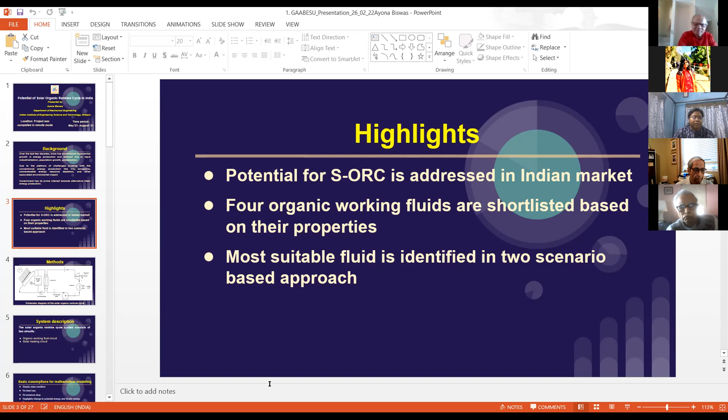Now come to the methodology part. The solar organic Rankine cycle consists of 2 circuits. One is the organic working fluid circuit, and another one is the solar heating circuit. The main components of the circuit consist of solar collector, thermal energy storage, circulation pump, expander, evaporator, condenser, working fluid pump, working fluid, heat transfer fluid.

The organic working fluid circuit consists of 4 processes. Process 1 to 2 is processed through the pump, where the working fluid is pressurized. Now the process through the evaporator. The pressurized working fluid is preheated, evaporated, and superheated by taking the heat from the water of the evaporator, and the working fluid reaches the maximum temperature of the cycle.

Now the process through the expander or turbine. The organic working fluid expands in the turbine, and the mechanical energy is converted into the electrical energy here. The superheated working fluid is cooled in the part condenser to the saturated vapor condition at a variable temperature in the desuperheater, and the saturated vapor is condensed to the saturated liquid in the condenser.

For the solar heating circuit, water is used as heat transfer fluid, and an evacuated tube solar collector is used as solar collector. Now come to the next slide. Next slide. Then next slide.

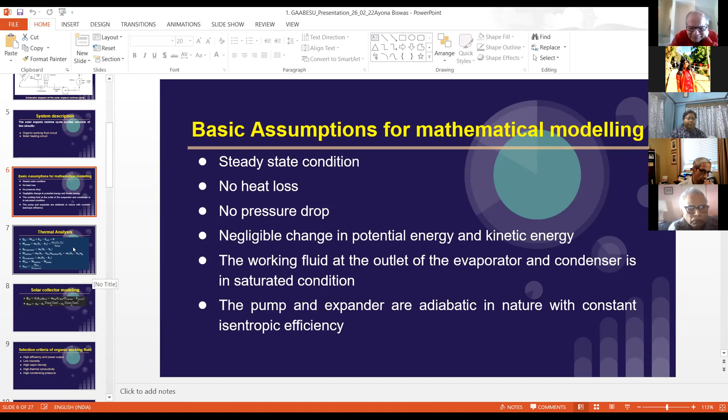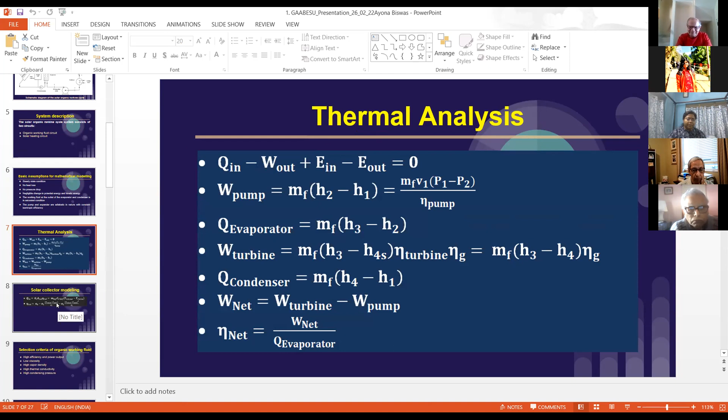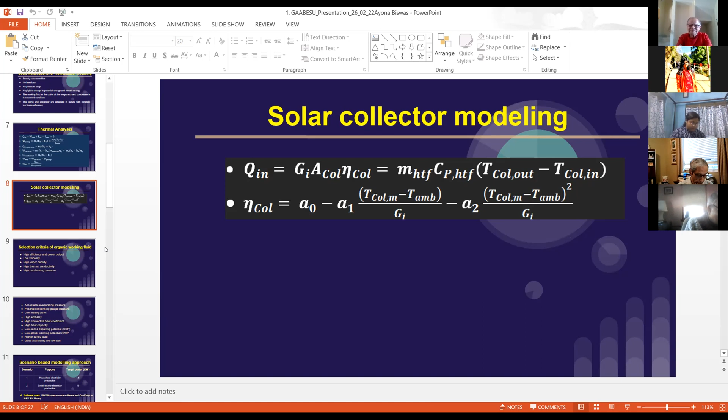The heat which is received by the solar collector and transferred to the heat transfer fluid can be calculated based on the collector energy balance expression as a function of collector efficiency. The mathematical formula of thermal efficiency of the solar collector can be expressed in terms of solar irradiance, which is denoted as G, and which is shown in this present slide. Then the next slide.

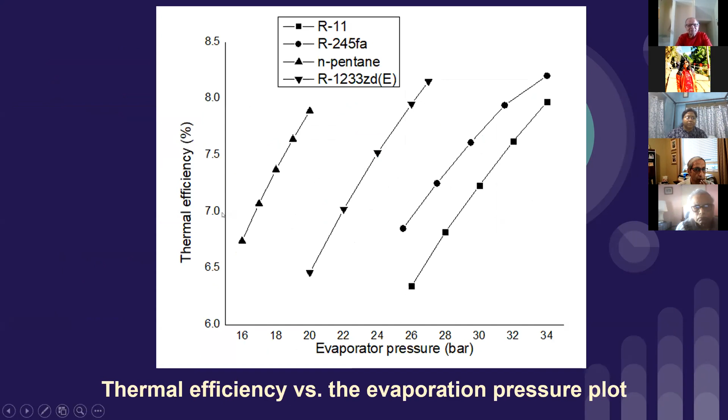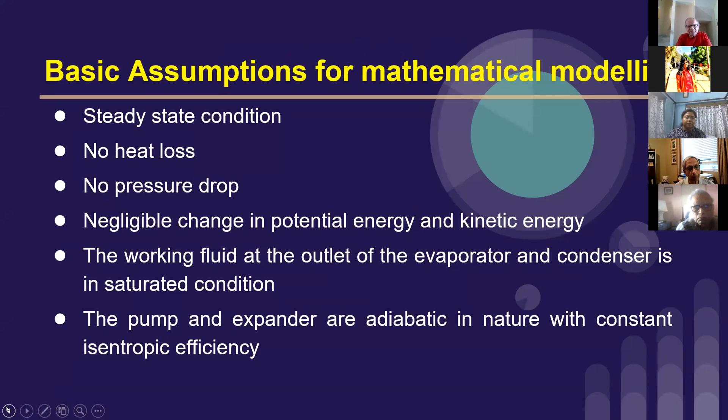Slide number 9. In this slide, slide number 9, the previous slide. No. Previous slide. Not this one. Yes, selection criteria of working fluid. Which slide? Thermal analysis, solar collector. Stop. Selection criteria of the working fluid. Yes, this one. Right. This one.

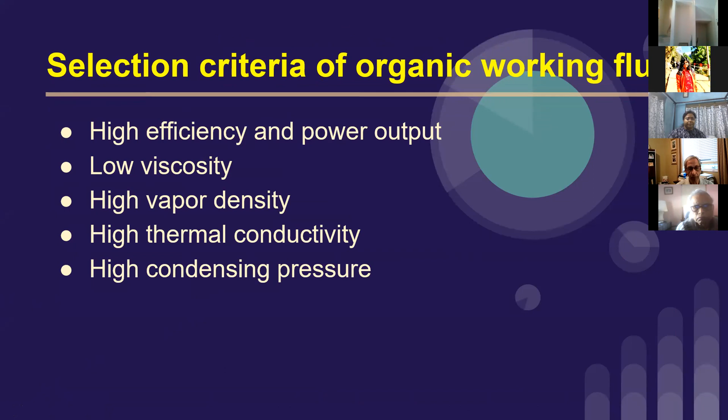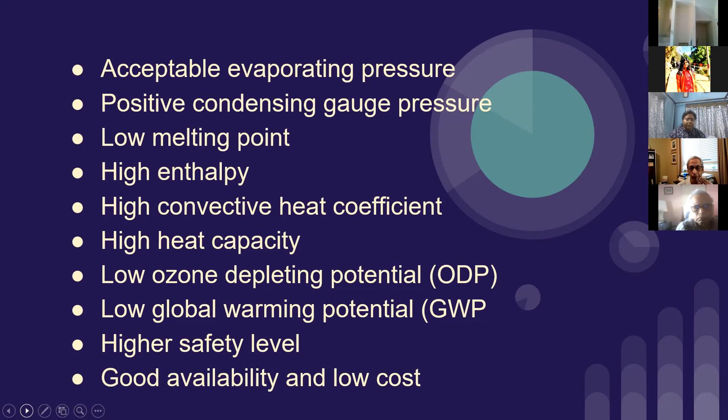The points which are mentioned in this slide should be taken into consideration to select the optimized organic working fluid: high efficiency and power output, low viscosity, high vapor density, high thermal conductivity. Then next slide. High condensing pressure, acceptable evaporating pressure, positive condensing gauge pressure, low melting point, high enthalpy, high convective heat coefficient, high heat capacity, low ozone depleting potential, low global warming potential, high safety level, and good availability and low cost.

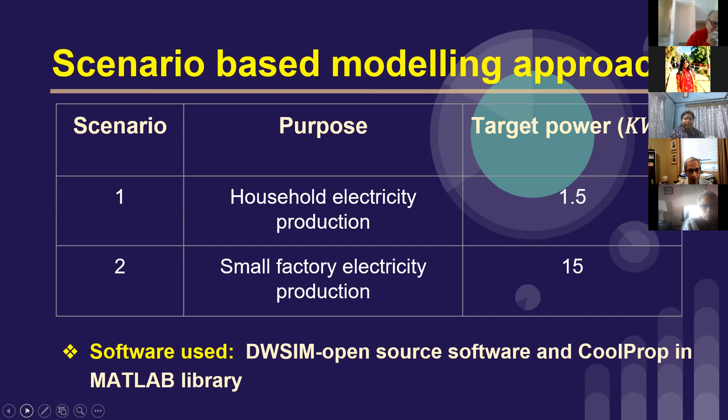The coefficient of performance is calculated by using DWSIM open source software and CoolProp in MATLAB environment. The targeted power output of scenario 1 is 1.5 kilowatt and scenario 2 is 15 kilowatt. The next slide.

Some assumptions have been taken into consideration during the simulation part. The ambient temperature is 25 degrees centigrade. The efficiency of turbine, pump, and generator is 70%, 85%, and 100%. And it is in steady state condition, negligible pressure drop across the expander, and condensing and evaporating pressure can be calculated from the saturated liquid at condensing and evaporating temperature. The evaporating pressure can vary from one working fluid to another working fluid. Next slide.

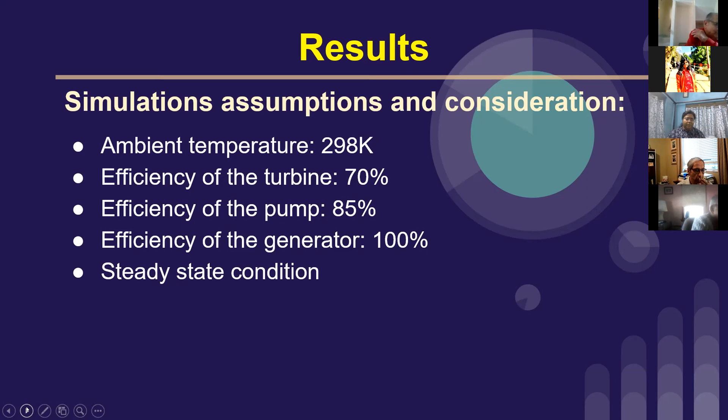4 organic working fluids are shortlisted according to their molecular weight, critical temperature, critical pressure, normal boiling point, atmospheric lifetime, ozone depleting potential, global warming potential, and availability in the Indian market. Then next slide.

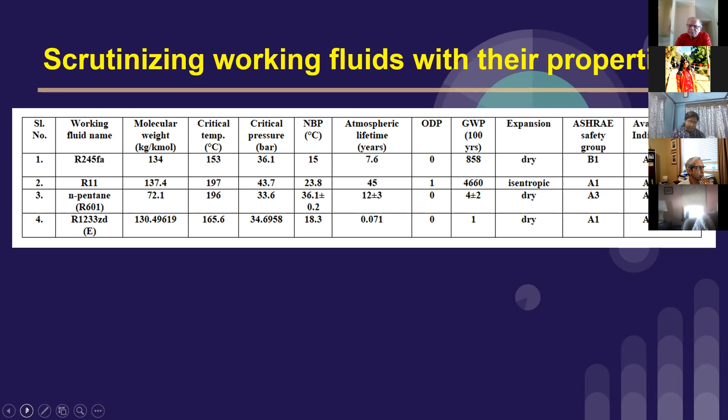The variation of net power output and thermal efficiency with evaporation pressure are shown in this slide and the next slide. And it is shown that the net power output as well as the thermal efficiency increases with the increase of the evaporator pressure for all working fluids. If the evaporator pressure increases, then the enthalpy of the expander increases, but the working fluid mass flow rate decreases. So the net power output increases.

The working fluid n-pentane produces a higher net power output and thermal efficiency with a lower value of evaporator pressure compared to the other working fluids. Then next slide. Next slide, then next slide.

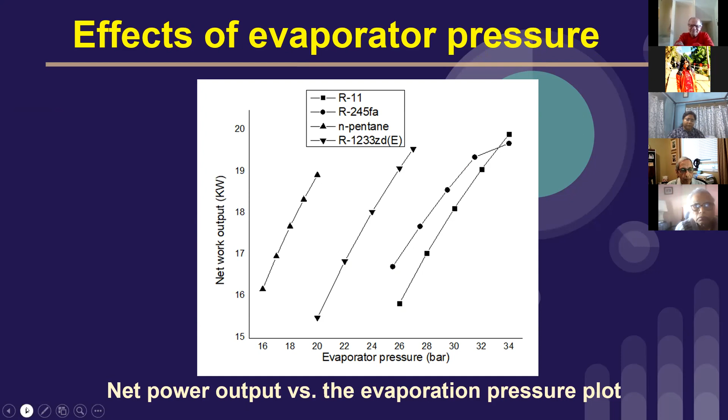In this slide and the next slide, the variation of the net power output and thermal efficiency with the turbine inlet temperature is shown. For every working fluid, the net power output increases with the increase of the turbine inlet temperature. For dry fluids like R245FA, n-pentane, and R1233ZDE, the thermal efficiency decreases with the turbine inlet temperature. For dry fluid, superheating is not required and it increases the exergy loss.

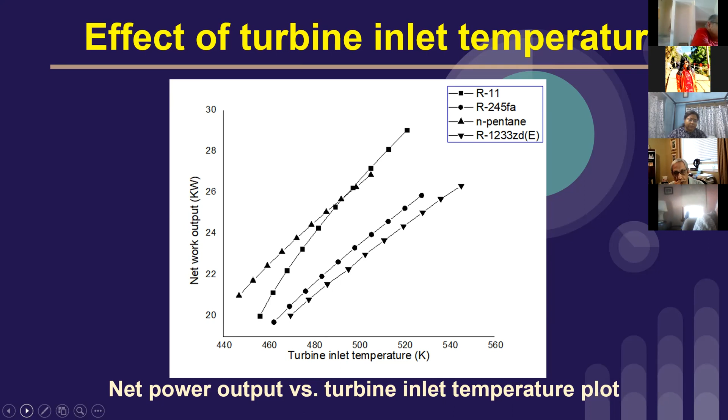For R11, which is an isentropic fluid, the thermal efficiency increases 3% by increasing the turbine inlet temperature. This means the dry fluid already leaves as a superheated vapor, therefore no attention needs to be paid to the vapor quality. The working fluid n-pentane provides the high thermal efficiency, which is 8.62% at a low turbine inlet temperature, which is 460 Kelvin. Then next slide.

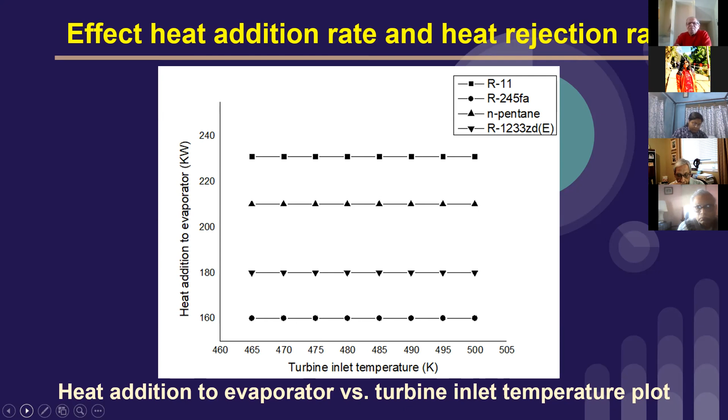The variation of heat addition to the evaporator with turbine inlet temperature and the heat rejected by the condenser with the turbine outlet temperature are shown in this slide and the next slide. R11 has the highest heat addition rate and heat rejection rate, and R245FA has the lowest heat addition rate and heat rejection rate. Then next slide. Next slide.

The coefficient of performance, net work output, and other calculations for all working fluids are shown in this slide and the next slide. This is for scenario 1, and then next slide. This is for scenario 2. Then come to the next slide.

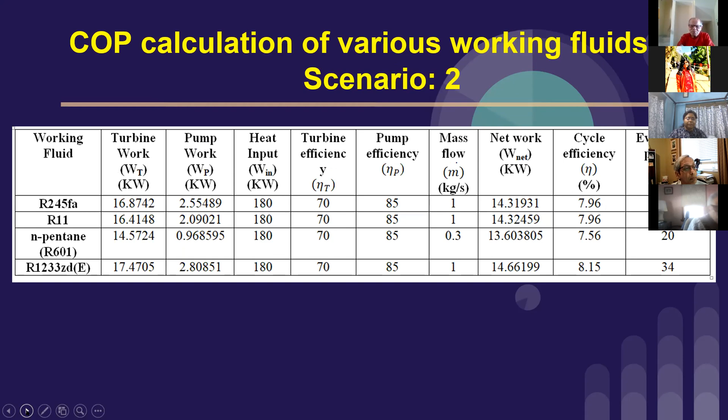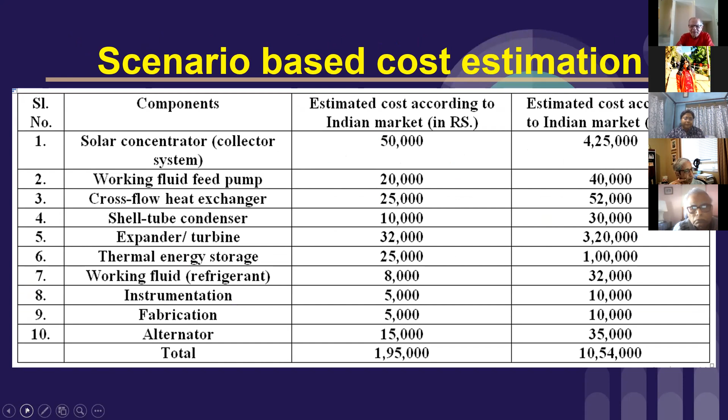Based on the Indian market scenario, the cost estimation is provided in this present slide for 2 scenarios. It is pertinent from the cost estimation part that the solar collector and the turbine hold the maximum cost of the entire system. Then next slide.

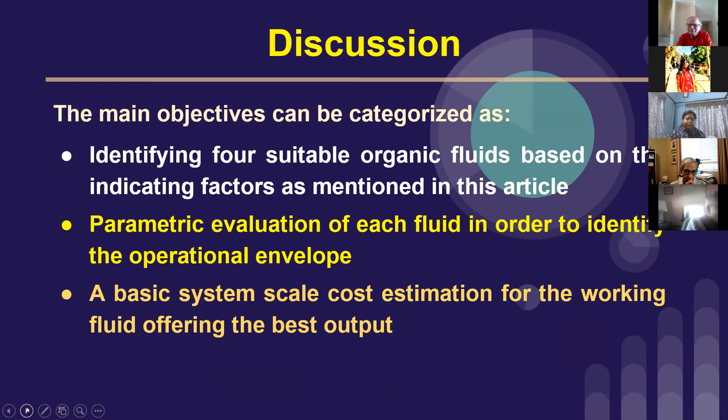The purpose of the work is to identify the viability of a solar powered organic Rankine cycle unit in the Indian climate scenario. The objective can be categorized as identifying 4 suitable organic working fluids based on the indicating factors as mentioned in this paper, the parametric evaluation of each fluid in order to identify the operational envelope, and the basic system scale cost estimation for the working fluid offering the best power output. Then next slide.

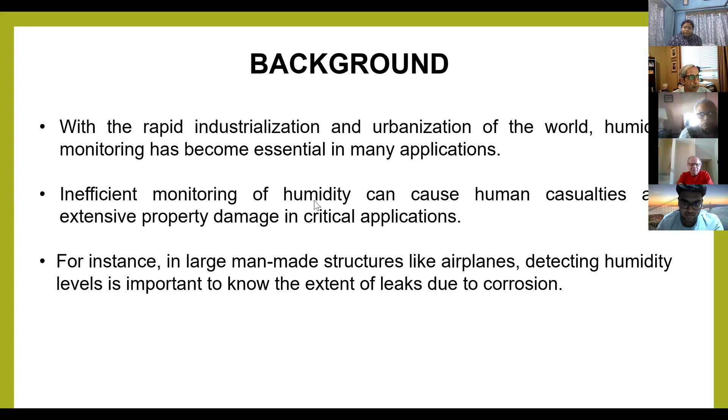In recent years, owing to significant health and environmental monitoring applications, the demand for wearable electronic devices has been growing rapidly. However, to be applicable to such devices, the humidity sensor needs to have the properties of flexibility, transparency, and must be fabricated at room temperature, which are features uncommon in traditional sensor systems. This is what motivated us to develop a humidity sensor, keeping such applications in mind, which produces robust output signals of wide range and is highly sensitive and linear in nature.

In recent years, metal oxide semiconductors have gained prominence in sensing applications due to their excellent electrical and chemical properties. Among such materials, zinc oxide proved to be a good fit for humidity sensing due to its high electronic mobility, good electrical conductivity, and low cost. Zinc oxide has been preferred especially here in the form of nanorods and nanowires, which can provide a much larger surface area with the same volume than in other forms of zinc oxide.

Here we prepare zinc oxide nanorods using a two-step hydrolysis process. In the first step, a zinc oxide seed layer was formed on the substrate by a sol-gel method. The second step involves growing zinc oxide nanorods onto the seed layer, which serves as a nucleation center.

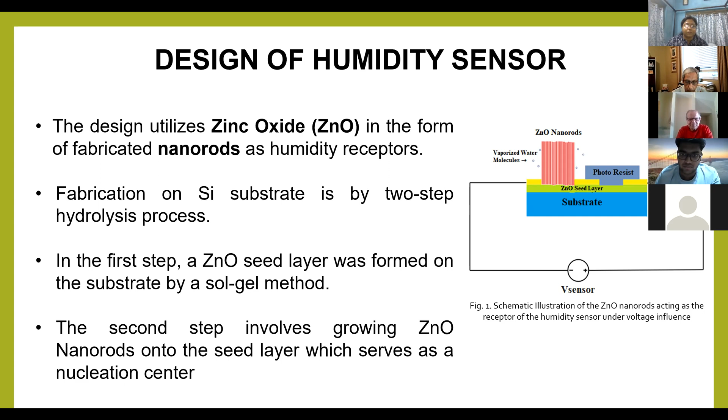Moving on to the methodology of the humidity sensor, to measure accurately by employing self-calibrating and error correction techniques, we have used here a Wheatstone bridge as the readout circuit and employed the fabricated structure onto a quadrant of the bridge, with fixed resistances occupying the other quadrants. The readout circuit is integrated with an IGZO TFT amplifier to improve the output signal strength for signal processing. Under voltage influence, this sensor equivalent circuit acts as a humidity sensor as per the given equation, and this voltage is amplified across the bridge, giving the output voltage.

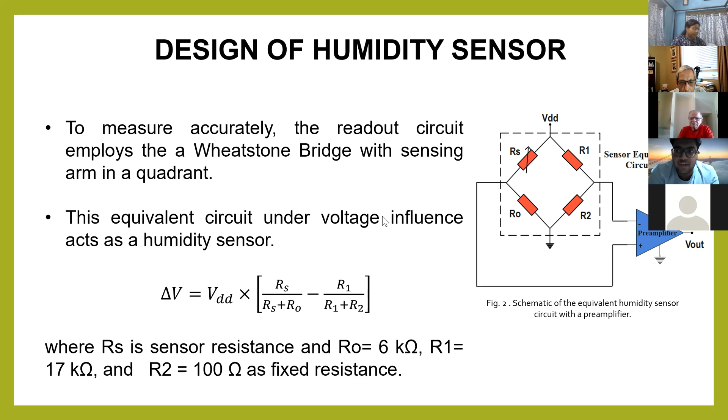Now, a thin film based preamplifier is preferred over a conventional MOSFET due to both sensor and amplifier on-chip integration. We use an IGZO layer as the TFT channel due to its excellent mobility, good transparency, and carrier concentration. The op-amp design implemented involves a two-stage topology, with the first stage exhibiting a high gain and the second stage exhibiting a high output swing.

For the first stage, we prefer a simple telescopic cascode topology over a folded cascode topology to reduce the larger static current and noise contributors in a folded cascode structure. A telescopic cascode op-amp can be used efficiently even at higher frequencies and has lower power consumption than other design topologies. A common source amplifier was utilized in the second stage as the high output swing stage. Differential amplifiers were not preferred as they could lead to a lower output swing. In addition, Miller compensation has been used in order to maintain the stability of the preamplifier.

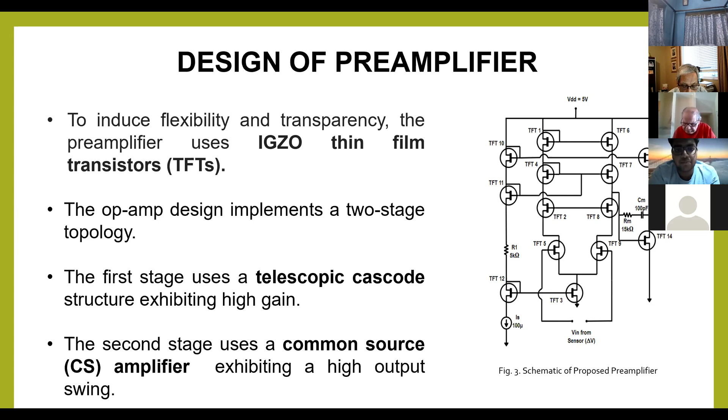We have compared this design preamplifier with existing similar TFT-based amplifier works. Performing AC analysis, the design achieves a DC gain of 54 dB, a 3 dB frequency of 3.4 kilohertz, and a unity gain bandwidth of 66.52 kilohertz. Our design has comparatively better gain and bandwidth than other models at a lower supply voltage and power consumption.

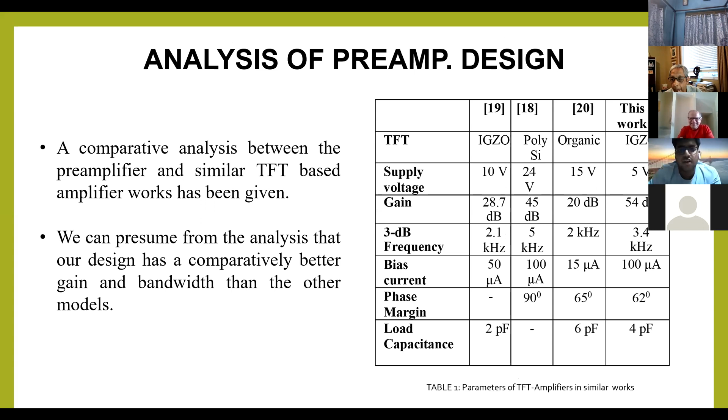To test the robustness of the design preamplifier, we used process voltage temperature (PVT) analysis. We recorded deviations in the 3 dB cutoff frequency and gain of the preamplifier on varying the supply voltage, temperature, and width of the TFTs. Interestingly, we find no noteworthy change in the gain and 3 dB frequency — the relative change is less than 1%, implying that the designed preamplifier shows robustness towards process, voltage, and temperature variations.

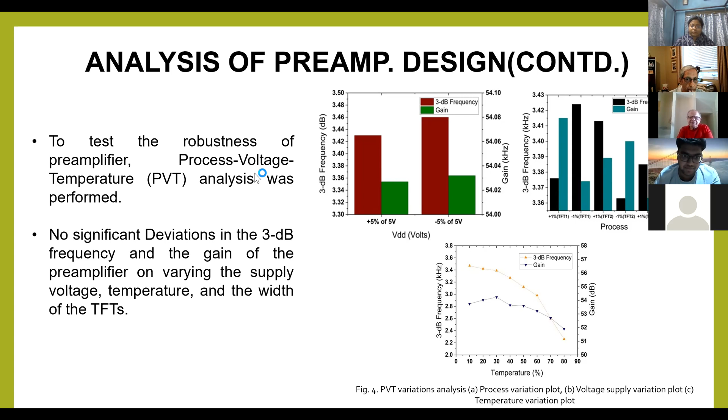The assembled humidity sensor is placed in an AH202 sealed high or low temperature humidity test chamber to expose it to different levels of relative humidity, analyzing sensor performance with and without a preamplifier. The amplified output voltage decreases from 464 millivolt to 332 millivolt as relative humidity changes from 10% to 90%, in increments of 5% during each measurement. The curve exhibits close to perfect linear behavior over the entire RH range. The designed humidity sensor system, along with the preamplifier, has a wide dynamic output voltage range of 132 millivolt, which helps the sensor overcome drift and makes it less error prone.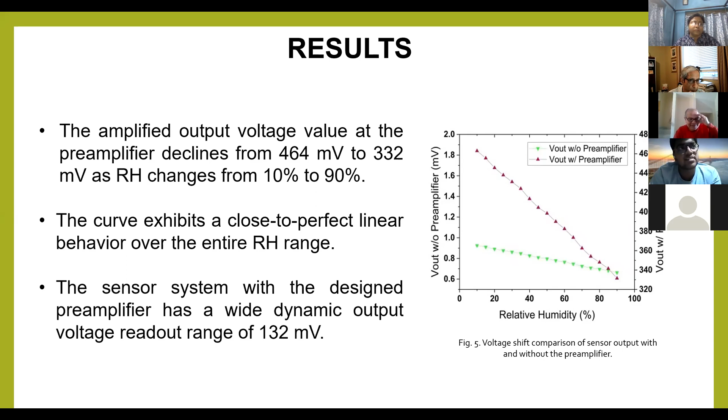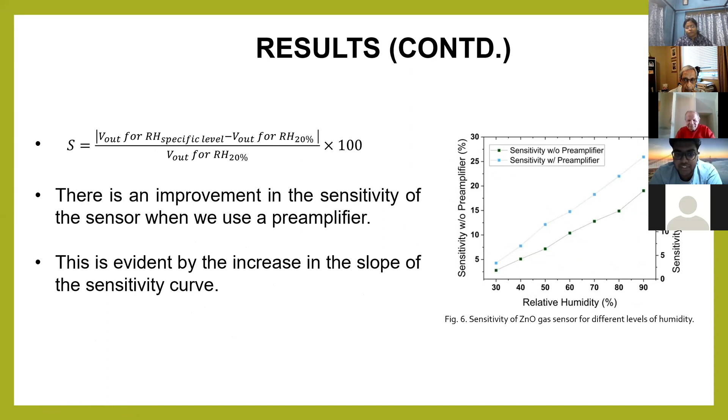Defining sensitivity at a particular relative humidity using the formula above, we calculated sensitivity for various relative humidity levels when the sensor is employed with the designed preamplifier and when implemented discretely. As relative humidity increases, the sensitivity of the gas sensor system increases almost linearly, an excellent feature for practical applications. There is also improvement in sensor sensitivity when using a preamplifier, evident by the increase in slope of the sensitivity curve when recorded with the preamplifier.

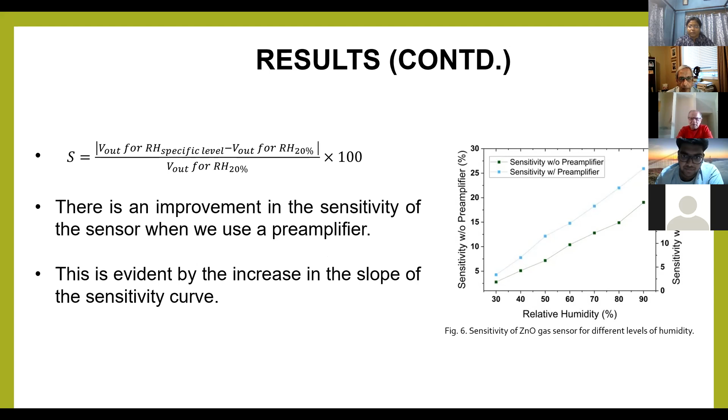To conclude, we have demonstrated that the assembled sensor portrays close to perfect linearity over the examined range of relative humidity, 20% to 90%, and shows good thermal stability as well as a swift sensor response. Amplification with the designed preamplifier yielded sensitivity and gain significantly higher than previous studies, and provided a stable, discernible output signal for further logic processing. This model also exhibits properties of flexibility and transparency in the sensor design, making it an excellent feature for emerging electronic applications.

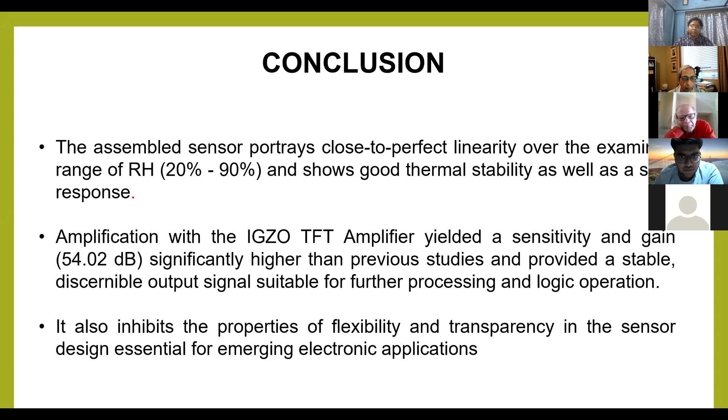Thank you for this presentation, and a special mention to GAABESU and our alumni for this beautiful initiative. I'd like any questions. Thank you very much, Shishir. And I like this slide, the last one.

Yes, sir. All right, I will entertain at least one question from the audience. Well, Shishir, this is Arup Bhattacharya. I enjoyed your presentation, congratulations, very good piece of work. Thank you very much, sir. Any other question? No? I hear none. Well, in that case, Shishir, thank you so much, and keep up your good work. Thank you, sir. All right, thanks. Yeah, right, good presentation.

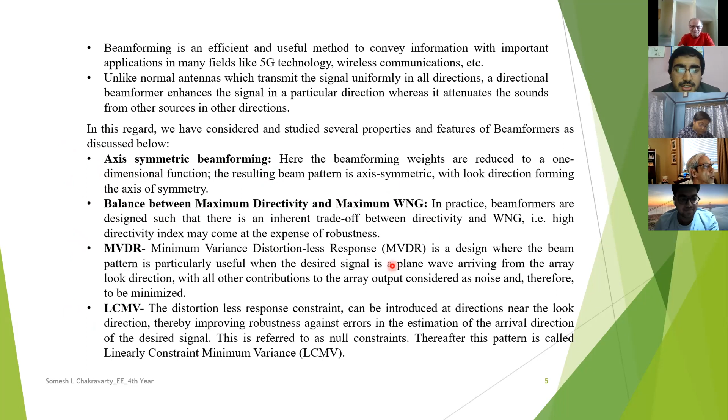In this research work, we have studied various variations of a beamformer and conducted research on its features. But due to time constraints, I have only incorporated a few important ones. Out of those, I would like to discuss axis symmetric beamforming. We also want to strike a balance between the maximum directivity beamformer and maximum WNG beamformer. We also have the minimum variance distortionless response beamformer and the LCMV beamformer.

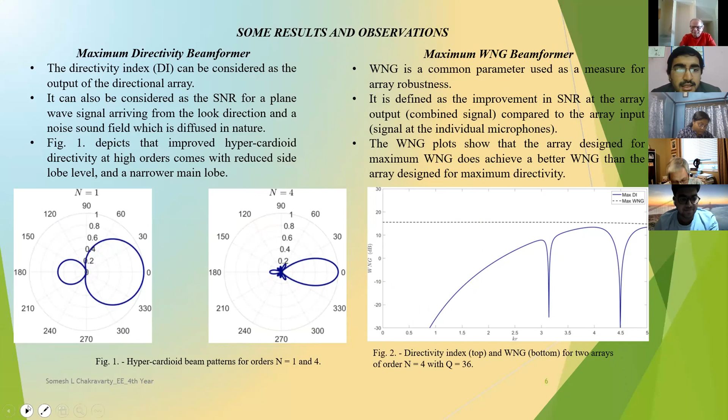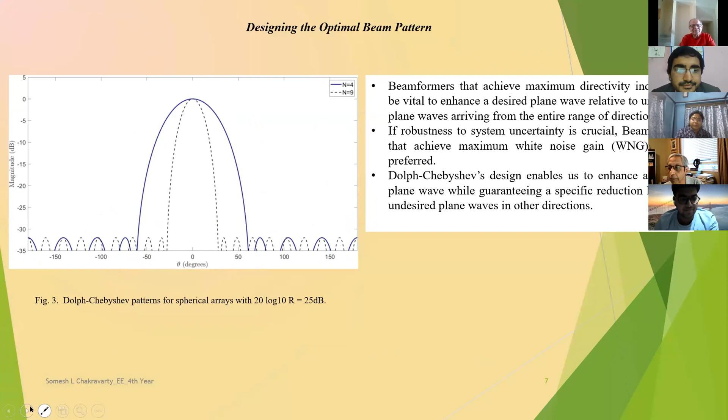Now what we do is try to strike a balance between a maximum directivity beamformer and a maximum WNG beamformer. For that reason, we go for a Dolph-Chebyshev design of beamformer. In figure 3, we can see that as we decrease the scaling factor, the side lobes increase in size, whereas the central lobe decreases in size. So although the directivity is improved, the sound coming from other sources is also given some importance, which may lead to some degradation of sound quality.

However, when you increase the scaling factor, the width of the central lobe increases, leading to loss of directivity. However, the sound coming from other sources is heavily attenuated. So basically, we want to strike a balance between directivity and WNG.

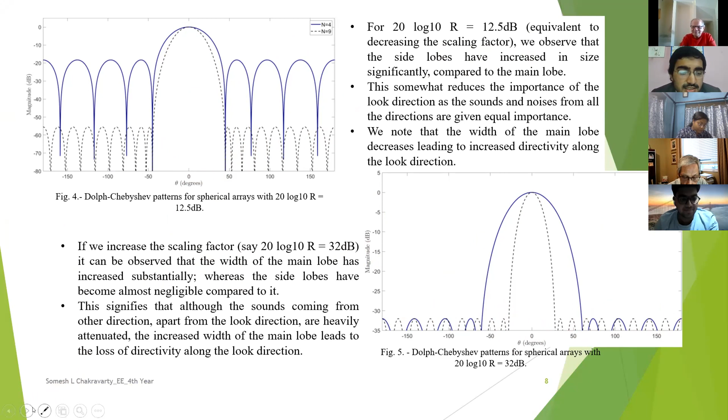Now I go on to my next work, titled Detailed Analysis of 6 MPPT Techniques on 3-phase Grid Connected PV System, which I did in collaboration with students from NIT Kurukshetra and scholars from IIT Roorkee. In fact, this morning I gave this presentation at the IEMRE 2022 conference, which is sponsored by IEEE and the Solar Energy Society of India.

So basically, we know that in the modern world, as load demand is gradually increasing more and more, we are becoming more and more reliant on renewable sources of energy like wind, solar, thermal, etc.

The most important aspect of this PV characteristic is that we try to extract the maximum power from this solar cell. For that reason, we have implemented 6 MPPT algorithms and compared them based on the stability during changing weather conditions, efficiency, and time taken to track the maximum power point. This is the basic MPPT tracking system, which consists of a PV array, a boost converter based MPPT tracking system, and a 3-phase inverter with a 3-phase grid.

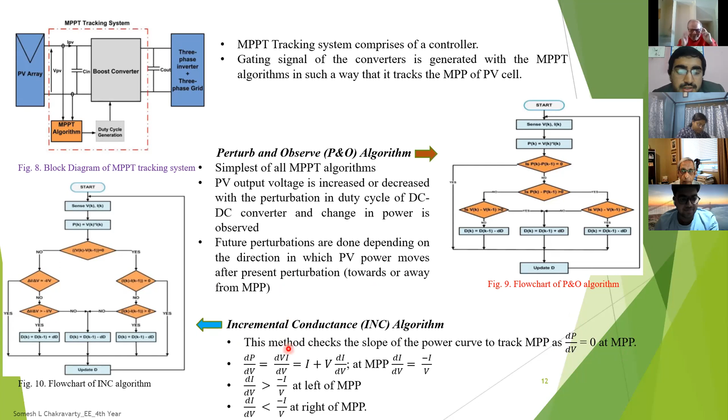So this figure 9 presents the flowchart of a perturb and observe algorithm, which basically works by calculating the difference in power and voltage in consecutive steps of iteration or perturbation. Based on that, we decide whether to move in the same direction of the PV curve or in the opposite direction. Now we have this INC algorithm, which basically checks the slope of the power curve, because we all know that at the maximum power point the slope will be equal to 0. From that conclusion, we try to derive the MPP solution.

And one of the most important algorithms we have used here is the beta method, which was proposed by Sachin Jain. What it does is that it calculates an intermediate variable beta, which places the operating point very close to the maximum power point. And from that, we use conventional MPPTs like perturb and observe or INC to track the MPP in small steps.

Now coming to the results section, we have at first compared the 6 MPPT algorithms on the basis of steady state power ripples. We can observe that INC and variable step INC are giving us large power ripples, which vary between 2 kilowatt to 3 kilowatt. Perturb and observe, hybrid or beta method give us relatively lesser ripples.

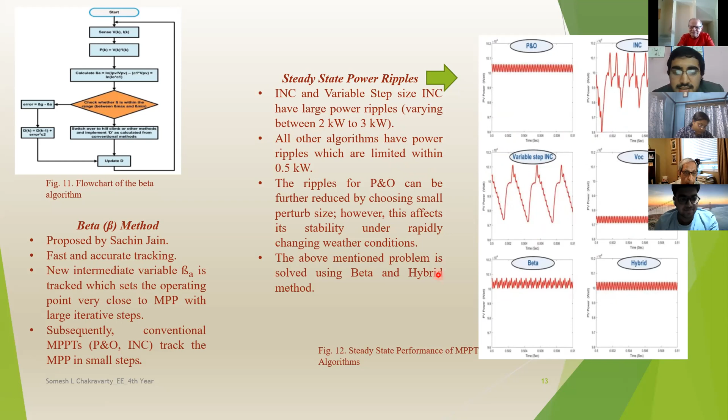Next we have compared the algorithms on the basis of the dynamic behavior of the MPPT algorithms under changing weather conditions. We can again observe the INC and variable step INC are giving large ripples compared to P&O or beta method. VOC is itself an unstable method because it changes with the voltage magnitude, which is also changing with the changing weather conditions.

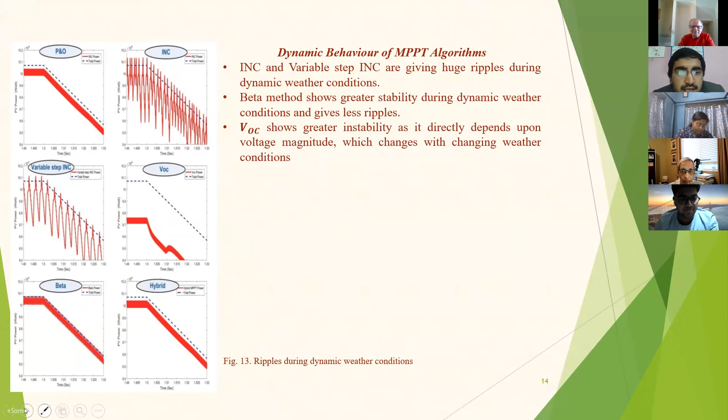Now we have compared the algorithms on the basis of power extracted from the PV cell. The red lines here denote the total power available from the PV cell, whereas the black lines denote the power obtained from the MPPT tracking algorithm. We can observe that for the beta method, the two lines are almost coincident, which means that beta method extracts the maximum power from a PV cell even under variable weather conditions.

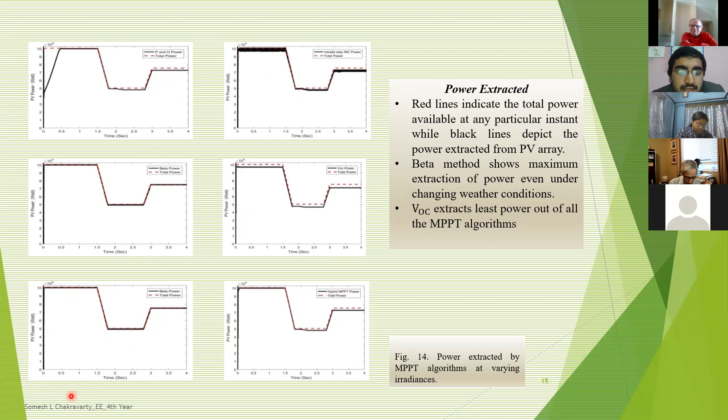Lastly, we have compared the algorithms on the basis of time taken to reach the steady state. We can observe that P&O method takes about 0.49 seconds, the largest among all the algorithms, whereas VOC, beta method or INC take relatively lesser time. Out of this, beta method proves to be the most robust algorithm. Also, it has the highest efficiency. So in conclusion, as we already mentioned, the beta method converges fast and also proves to be a robust algorithm under changing weather conditions and grid dynamics.

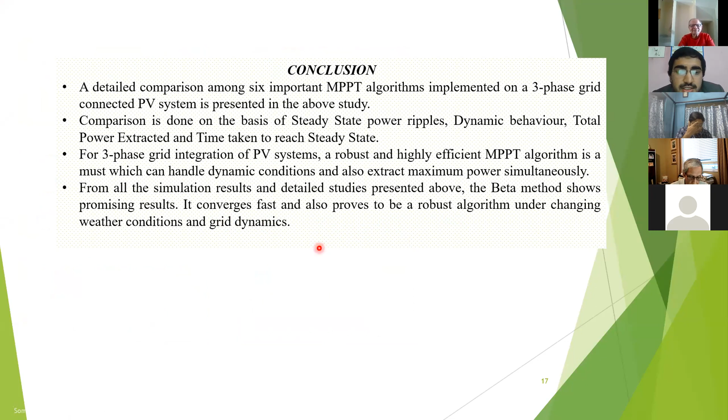Now I move on to my third research work. This is a novel approach to detect power theft in distribution systems using machine learning and artificial intelligence. I'm doing this work currently under Dr. Abhinandan De, Associate Professor of IIEST Shibpur, Department of Electrical Engineering. This has been accepted for presentation in the 4th International Conference on Computational Intelligence in Pattern Recognition, which will take place in our IIEST in the month of April.

So what we have done here is that we have at first collected the historical consumption data of 100 consumers of CESC for 2 years and validated that with the consumption data for the year 2020. After that, we have used 6 machine learning approaches like decision tree, random forest, SVM or logistic regression on the dataset. After the algorithms are adequately trained to recognize the historical consumption patterns of the individual consumers in different times of the year, these trained ML algorithms can identify any major deviation in the consumption pattern, and the algorithm marks such deviations as probable cases of power theft.

So here we have used the decision tree algorithm. We have separated the consumer data points as 75 to train the algorithms and 25 to test our algorithm.

We can see that 17 consumers are not committing any theft, and the decision tree algorithm also states that they are not committing any theft, whereas 7 consumers are committing theft, and the decision tree algorithm also states that 7 consumers are committing theft. One consumer here is a false positive: this consumer is basically not committing any theft, but the algorithm says that he is committing theft. So basically the decision tree gives an accuracy of 17 plus 7, 24, or 96%, as the confusion matrix clearly

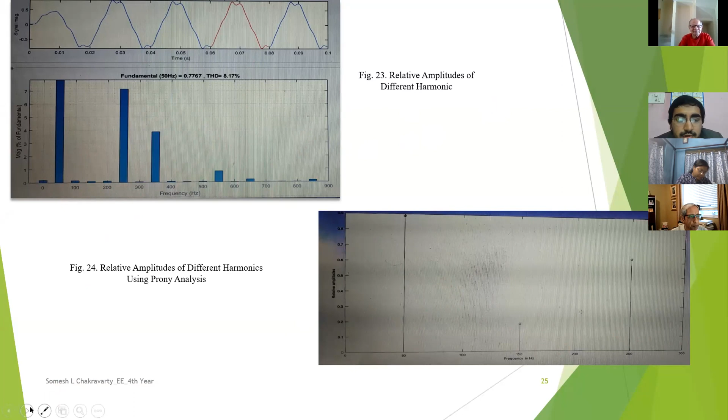Thank you very much, Somesh. Oh, you are very busy working on a lot of different things. Yes, sir. I actually like working on these research projects because they give me a lot of knowledge about much of the research work currently going on around the world.

Sure, sure. Nihar, if I might make a comment. Yes, please. Somesh, first, congratulations on an excellent presentation, and particularly the breadth and scope of your research activities. Personally, I was most impressed by your attempts to use AI and machine learning techniques to detect power theft, which I take it is a very major problem in India. Yes, sir. I do hope that you will go on to continue with your research activities, because it is very, very rare to find somebody at the undergraduate level to have one or more papers accepted and published at an international conference or in an academic journal.

If we as alumni can help you in your further studies, please feel free to contact us. That is what we owe you. Thank you very much, sir. Thank you very much for providing me with this opportunity. Yes, Somesh, this is Arup Bhattacharya. I totally second what Praveen said. And wish you all the best. Thank you, sir. Thank you, sir.

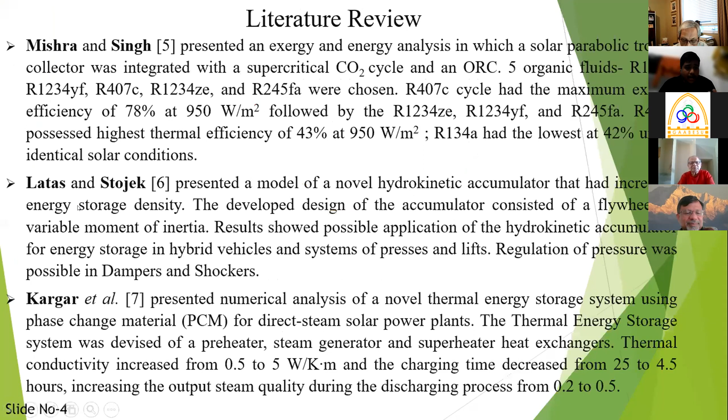While we were doing the major project, we have gone through many research papers, conference papers, magazines, and several works have been reported for hydrokinetic accumulation and renewable resources with conventional power integration. But no such work with a hydraulic accumulator integrated system has been reported in the Indian context as of now. The void in research gave us the objective for the project.

So our main focus was to conceptualize the use of a solar collector integrated with the organic Rankine cycle as a renewable power resource for space heating system, to present a mathematical model that illustrates the functioning of a parabolic trough collector system, and to perform a validation of the model using the established literature and analyze the behavior of the model under the Indian climatic condition.

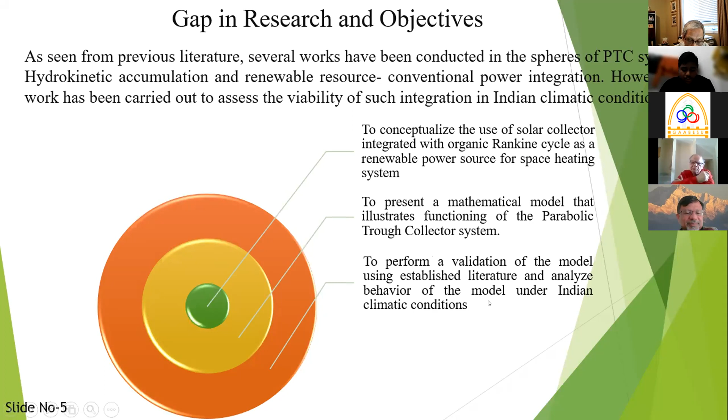The heated water is used to run the hydraulic pump. The required speed is 1800 RPM. And the pump operates perfectly when the solar irradiance is in the range of 450 to 700 watt per meter square. But what happens if the solar radiance is above or below the prescribed range?

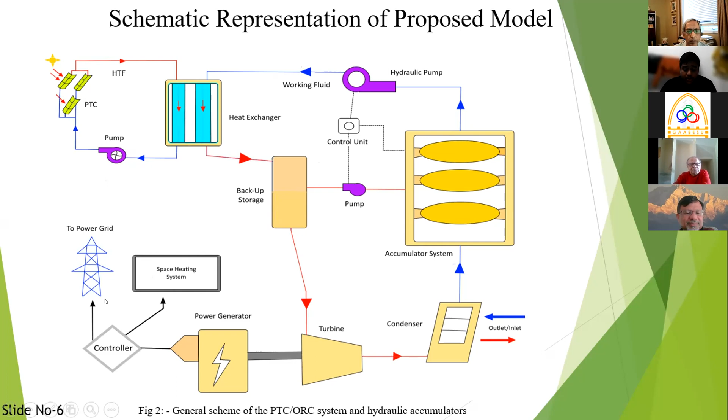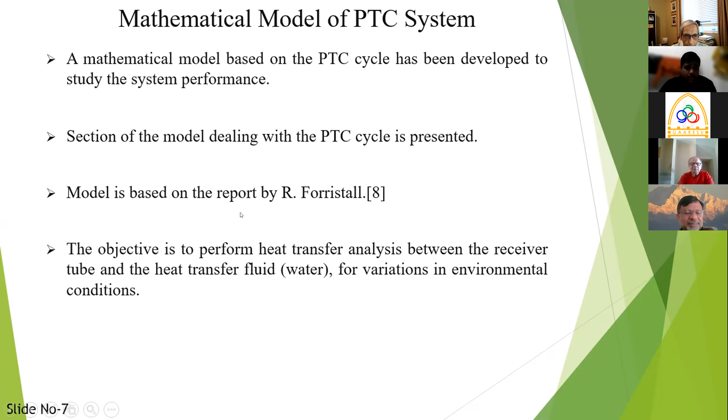A mathematical model based on the PTC cycle has been developed by us to study the performance. The section of the model dealing with the PTC cycle is presented, and this model is based on a report by R. Forristall. These are some of the assumptions we considered during the design of the model.

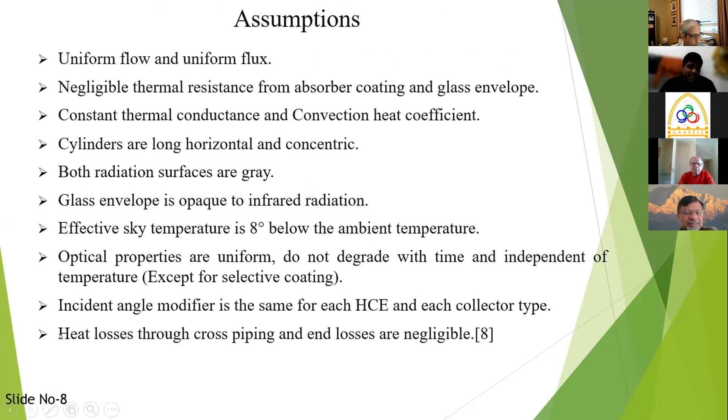Some of the important ones are uniform flow and uniform flux, negligible thermal resistance from absorber coating and glass envelope, constant thermal conductance and convection heat coefficient. Both radiation surfaces are gray, and the heat losses through the cross pipings and the end losses are considered to be negligible.

These are the equations which were used by us. The main objective is to find TC out. In this equation, T1 is the mean temperature of the heat transfer fluid. Q3SAB is the incident solar radiation to the outer absorber pipe surface. Q5SAB is the incident solar radiation to the outer glass envelope surface.

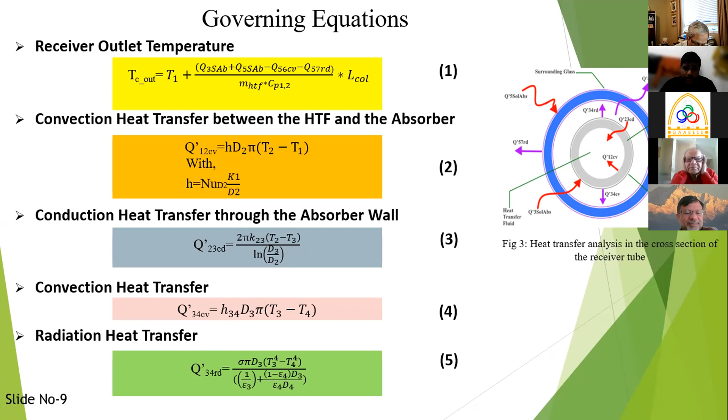Q56CV is the convection heat transfer from the outer glass envelope to the ambient. Q57RD is the radiation heat transfer from the outer glass envelope surface to the sky. And all these variables are found using the following equations, given in equations 2, 3, 4, 5, 6, 7, 8, 9, and 10.

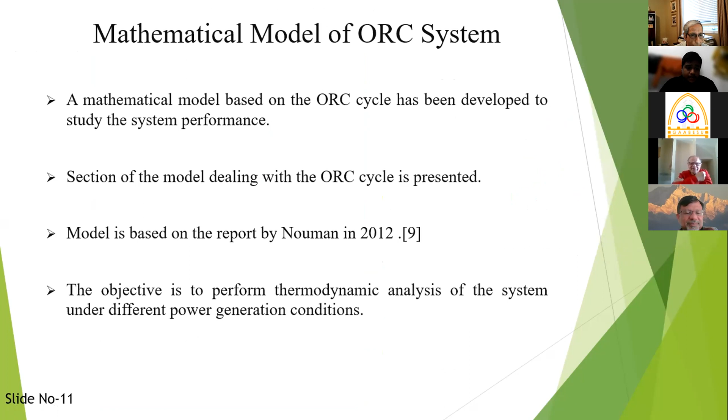A mathematical model based on the ORC cycle has also been developed by us to study the performance. The section of the model dealing with the ORC cycle is presented, and this model was based on a report by Nouman in 2012. These are the assumptions considered during the design of the ORC cycle.

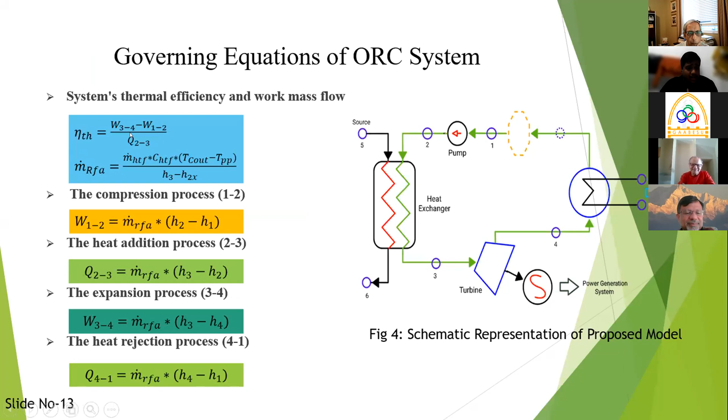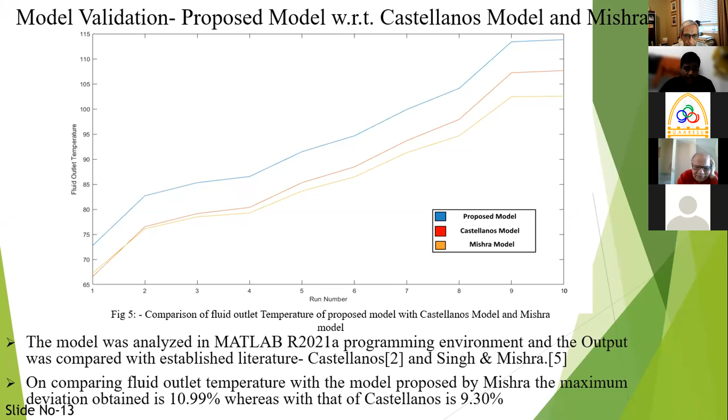The model is also analyzed in the MATLAB 2021 programming environment, and the output was compared with two established literature sources, namely Castellanos and Singh and Mishra. On comparing the fluid outlet temperature with the model proposed by Mishra, the maximum deviation obtained was 10.99%, whereas with that of Castellanos it is about 9.30%.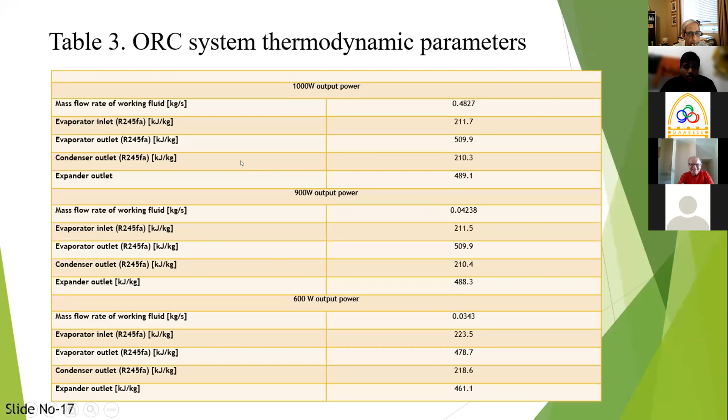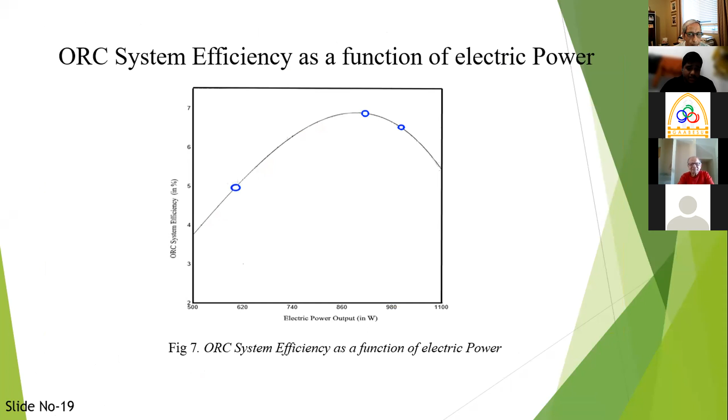In conclusion, the study presents the integration of a PTC system coupled with a modified ORC cycle and a grid interaction mechanism. As the study was entirely theoretical, validating sections of the system with published experimental and theoretical data provides valuable insights. The study thus reinforces the need and viability of such a grid interactive system comprising a PTC collector and a bladder accumulator based storage for operation in developing countries like India.

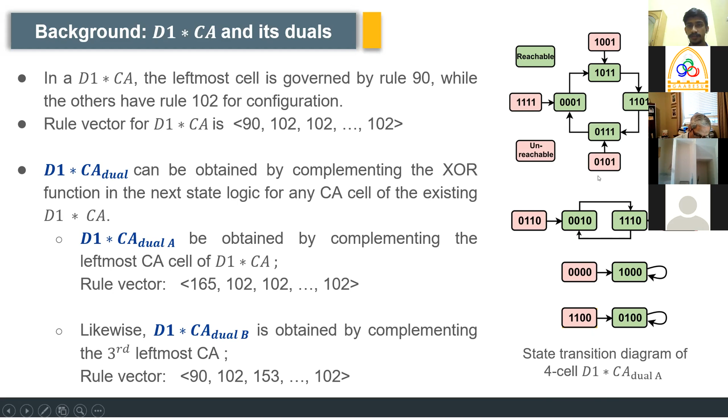Coming to the main properties of D1CA: as we saw, all the reachable states of D1CA lie on a cycle, so they are named cyclic states. All the D1CA states which are cyclic have an even number of ones in their binary representations, that is, they have even parity.

Coming to the third property, the D1CA whose number of cells ranges from 2 to the power k minus 1 plus 2 to the power k plus 1 has a maximum transition cycle length of m equals 2 to the power k.

The fourth property shows that if m is the maximum transition cycle length for a particular D1CA transition diagram which has n number of cells, then the set of transition cycle lengths for that D1CA are all the factors of m. From these properties, we reach a proposition that if an FSM which follows the D1CA rule, starting from reachable state S, makes m or any multiple of m number of transitions, the D1CA goes back to its initial state S.

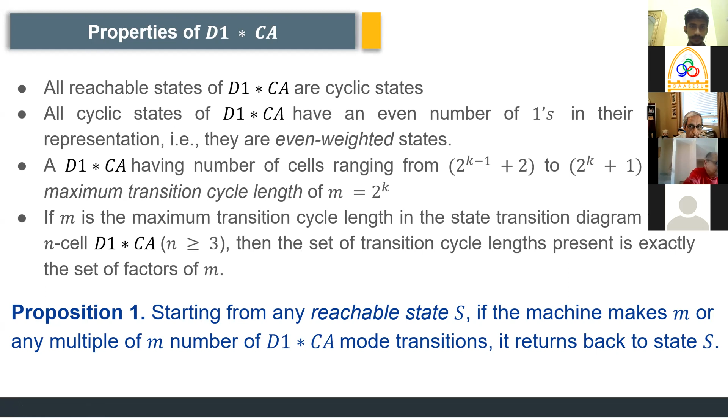Next, we come to how D1CA has been used for obfuscating FSMs. FSM states and transitions have been implemented using D1CA blocks. A state encoding algorithm has been followed to assign FSM states to each state of the D1CA.

Next, the transitions are governed by a particular control signal, which is C key. When C key is 0, the state machine undergoes a D1CA transition in normal mode, while when C key is 1, the state machine undergoes a transition in D1CA dual B mode.

Since we're encoding states of the CA machine to that of an FSM, a number of unmapped state transitions could be possible. To map those unmapped state transitions, we use additional conditional logic named interrupt logic. The interrupt logic outputs an interrupt vector called IV.

Next, we take an example of a state transition to show how the IV helps in mapping unmapped transitions. Here we take a state transition from SJ to SK. If we want to make the transition in D1CA normal mode, C key has to be 0, and the IV provided by the interrupt logic is FK XOR FJ, where FK and FJ are the state encodings of SK and SJ respectively. If we use C key equals 1, the state machine undergoes the D1CA dual B transition mode, and the corresponding IV is FK XOR FL.

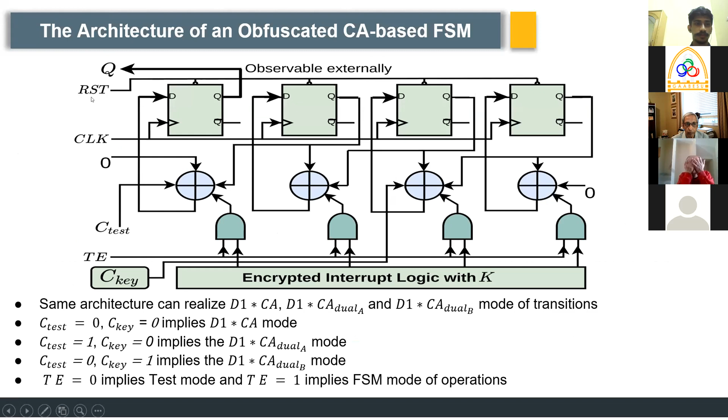The main thing to notice is that the leftmost cell has an observable output, Q, and this has been predominantly used for attacking this algorithm. As discussed, the state machine undergoes two types of transitions, FSM and test mode. FSM mode depends on C key, and test mode occurs in autonomous mode, which is the normal D1CA and D1CA dual A.

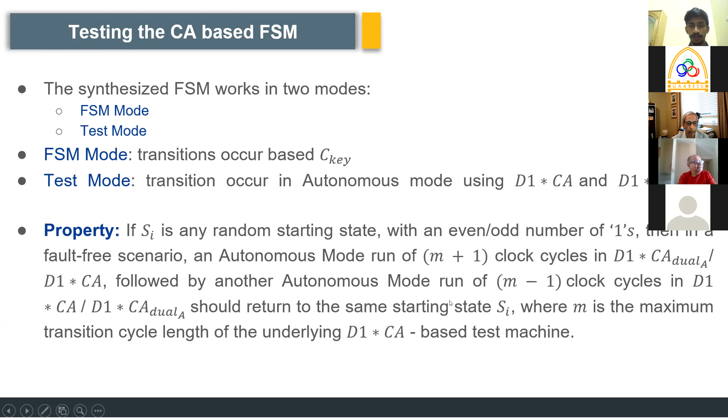The property used for testing the CA-based FSM is that if we start from a particular state in the state machine and undergo m+1 clock cycles in dual A or normal mode, depending on the even and odd number of ones present, followed by m-1 clock cycles in D1CA normal and D1CA dual A mode, the state machine returns back to the initial state.

So here we give an example. If we start from state 1101 and undergo m+1 D1CA transitions, where m equals 4, so if we undergo 5 transitions continuously, and then undergo dual A transitions for m-1 clock cycles, we return back to this particular initial state.

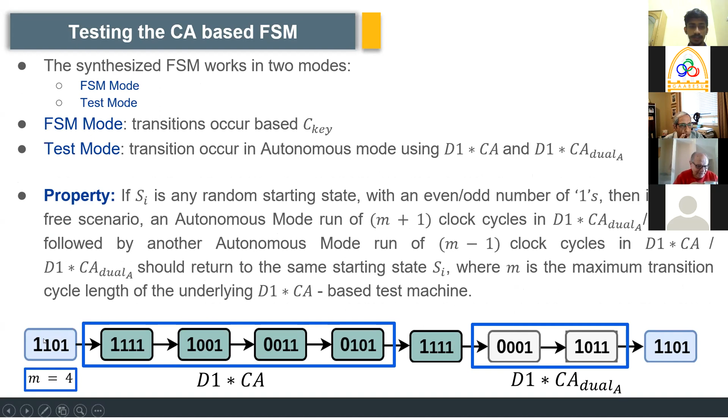So the external observable signals for this FSM are the sequence of leftmost cells and the primary outputs. This provides high testability and eliminates the scan-based DFT technique for this particular architecture of FSM.

And the QS sequence that we observe for the leftmost cell is unique to each FSM state S of an N cell CA. So here we have a particular sequence of transitions, and if we take the leftmost bit of every transition, we get the QS m+2 sequence.

So we show how this QS m+2 sequence can leak the information of the state encoding, which was supposed to be a secret. So here we present a particular example.

So if initially for a 4-bit FSM, the initial state of the CA machine was F, whose bit configuration was F1, F2, F3, and F4, after the first initial transition, we have the leftmost bit observable. So the bit leaked is F1.

If we make a D1CA dual A transition, we reach state F2, and here we see, according to the rule of the D1CA, the F2 bit is observable at the leftmost element. So the F2 bit is leaked.

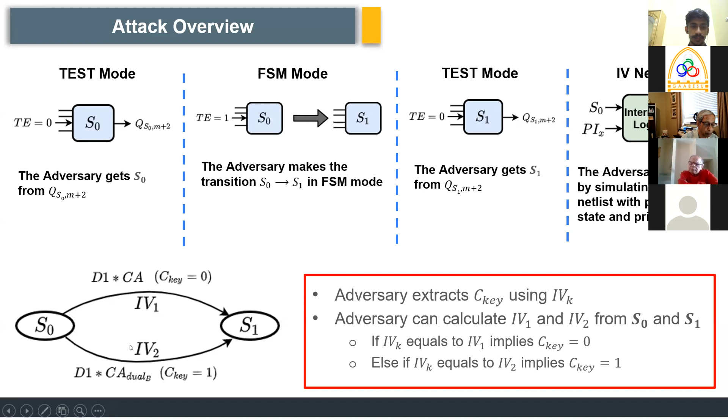So if we see the IV1 matches with that of the IV we have calculated, we can infer that the key has been 0. Otherwise, if it matches with IV2, we can conclude that the key equals 1.

So in case 1, as we mentioned, the interrupt logic is not encrypted. So if we make a transition from S0 to S1, and we obtain the IV from the IV circuit, we can infer what key has been used to obfuscate that particular transition.

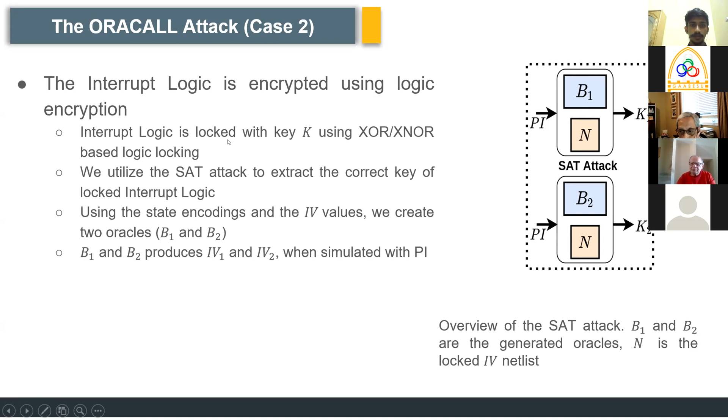So thank you, everyone. Thank you, Rivu.

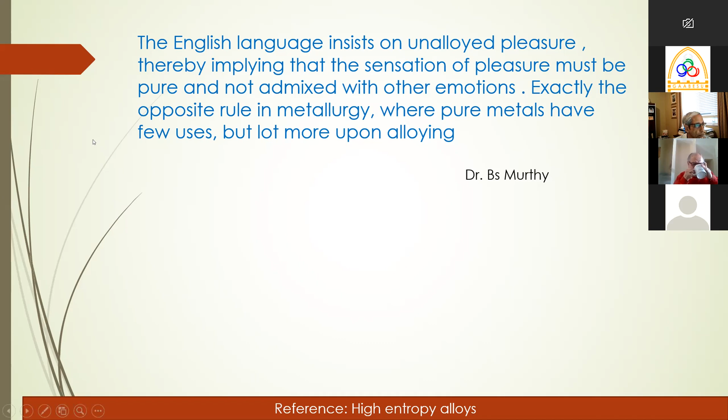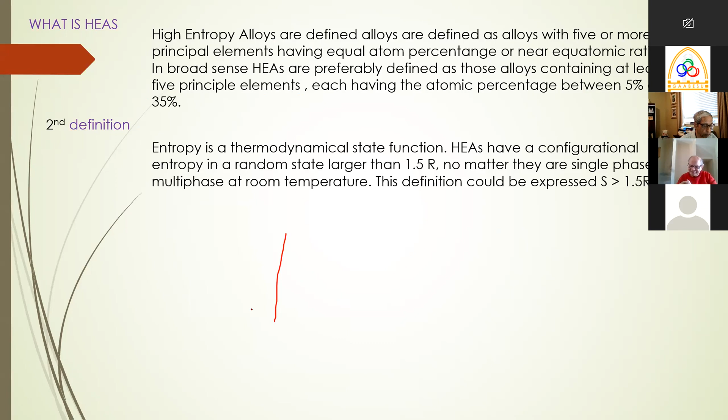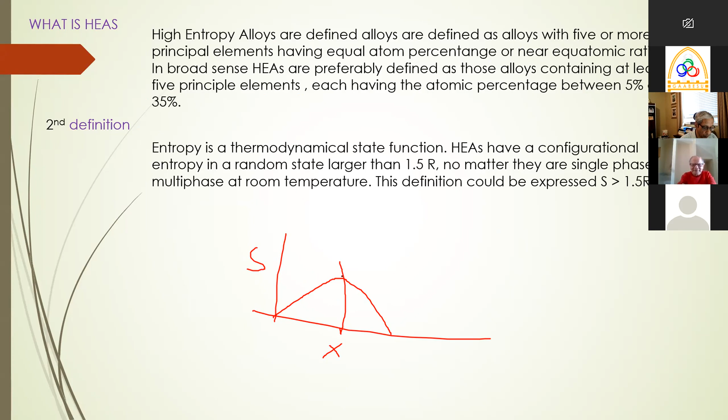Let us start with the definition of high entropy alloys. These are alloys where we mix 5 or more principal elements having equal atomic percentage or near equiatomic ratios. In a broad sense, they are preferably defined as those alloys containing 5 to 35% alloying elements. A second definition is from the approach of entropy, where configurational entropy should be greater than 1.5R. If we plot entropy against composition, we see the maximum at the middle of the graph. So as we alloy, entropy increases, which helps decrease the free energy. This is the principle of high entropy alloys.

I would like to carry out my other slides with some questions. First: what is the motivation and basic aim of this work? The main motivation is the exceptional behavior of high entropy alloys, like their fatigue property, thermal property, and other mechanical properties. The main aim of this work is to predict the phases, which may be solid solution, intermetallic, or amorphous.

Next question: why is phase prediction important? It is important because phases decide the mechanical character. If it is intermetallic, it's going to be brittle, and if it is solid solution, it gets solid solution strengthening. So why machine learning? Why not other approaches?